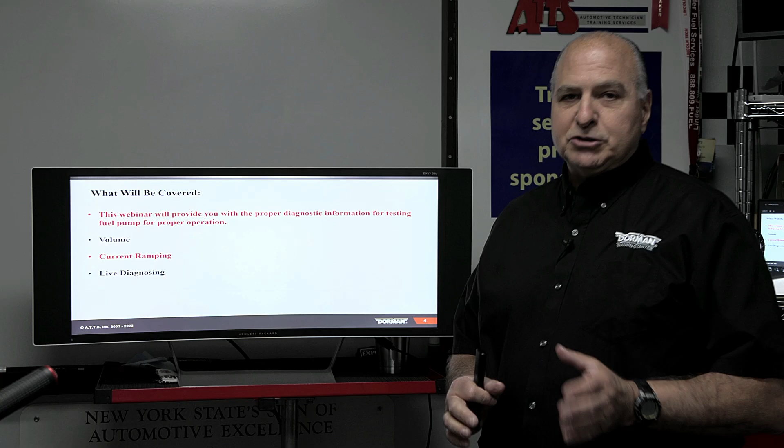So what are we going to do today? Here's what we're going to do. This webinar will provide you with proper diagnostic information for testing fuel pumps for proper operation. We're going to do volume. We're going to do current ramping. We're also going to do pressure. Now, everyone loves the pressure game. How many of you out there actually do volume? Could you type a letter V in there if you do volume so I can kind of see that? Because volume is the key.

You know, like in electricity, voltage is pressure, amperage is flow. Which one does the work? The flow of electrons, right? Amperage. Same thing in fuel. And I'm going to prove that to you. If we could switch to the board.

This is a special fuel pump tester machine. Thank you, good guys out there. And if you don't have one, I'm going to tell you how to get one. So this particular setup right here, I'll just throw it on real quick, but we're going to be using this. So we can see we have pressure, we got volume, and we got current. We're also going to current ramp it on a scope.

So I'm going to show you the first thing that you really want to do when it comes to checking an automotive fuel pump, or for that case, even a diesel primary pump. Remember, never a secondary pump, including GDI, gasoline direct injection. So we'll be using, let me shut that off, because it'll be noisy in the background. We'll be using this special fuel pump testing equipment to prove out amperage, pressure, and volume, okay?

So we're always going to start with the easiest thing first. And by the way, this tester uses lamp oil, so it's not dangerous like gasoline. I will switch out a couple of fuel pumps, and that way we can test it. How many bar commutator do we usually have in an automotive pump? Usually have. Sometimes there's variables. So if you can type a number in there, that'd be great. Can I ask you a couple of questions?

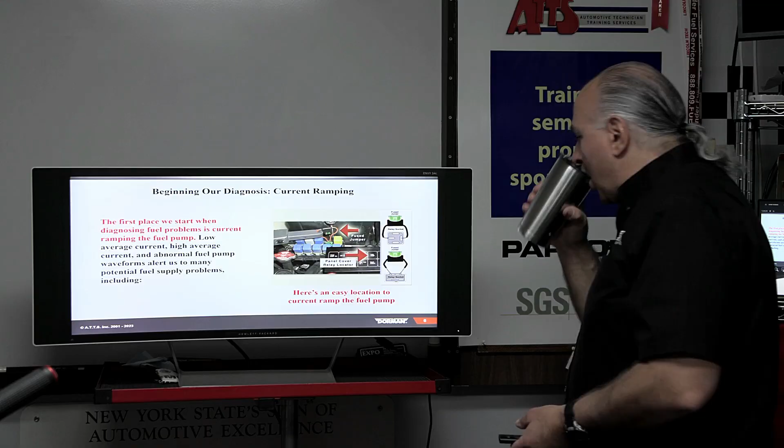What do you think that was?

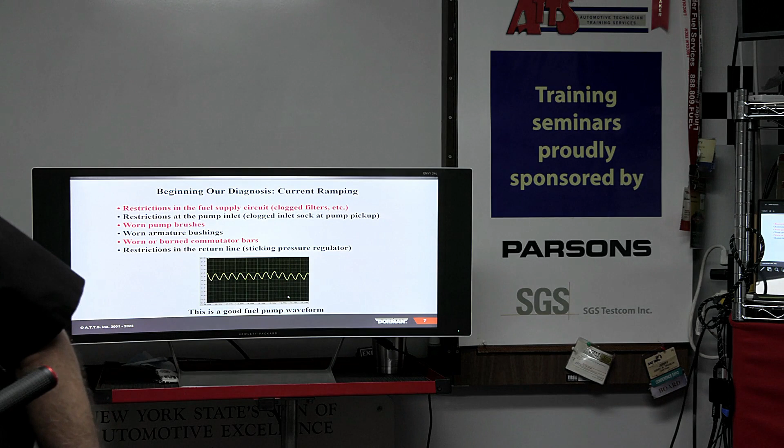And what happens at the end of a pump? What we have in these things, like this pump here, we got bushings in here that go near the end. So let me put this close to me. You got a bushing here, and the nylon bushings heat up, and the nylon bushings tend to melt, and rather than this thing going in a perfect circle, it's going to wobble. It's going to wobble because in here is a magnet. And of course, now we got three-phase fuel pumps, but we're just talking regular fuel pumps in this particular one.

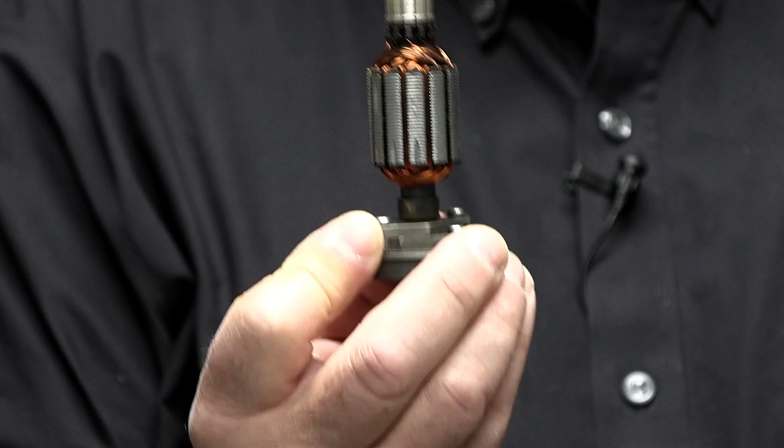This is your armature. The armature here is every one of these things where you see the winding go through. So this one is not an 8-bar or 6-bar. This is a 12-bar pump, okay? 12-bar pump. And usually the German manufacturers do a better job with putting bearings in there. So if you get a Pierburg pump, some of the Bosch pumps, some of the Siemens pumps, those pumps are better, not inexpensive, but most of the other pumps you're working on have a nylon bushing.

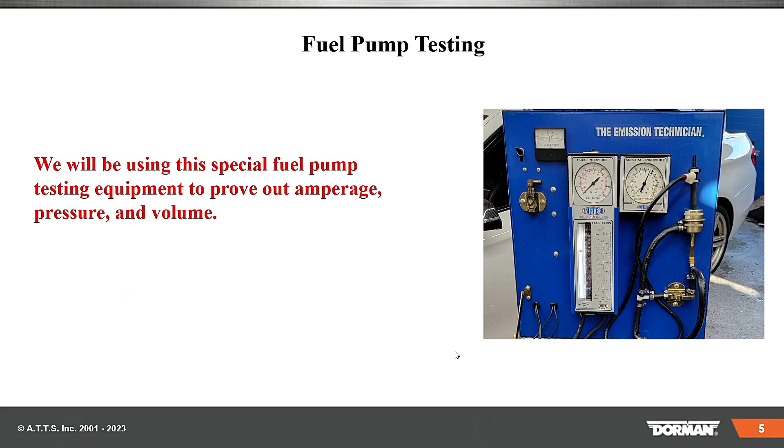Run it low, heat transfers to a nylon type of bushing, what do you think is going to happen? Rather than going perfectly round, you're going to be wobbling once it heats up. Oop, I went backwards. Sorry about that. Worn or burnt commutator bars, that can happen. Restriction in the fuel line, sticking pressure regulator, that would give us higher amperage, correct? So you always want to check what it is. This is a quick, fast check.

9 out of 10 times you could easily connect to one of the wires, positive or negative near the fuel pump, or go to the fuel pump relay like we said. In most cases, not all cases, because I know the real world. Sometimes they tell you number 8 is the fuel pump relay, and you go there, it's not the fuel pump relay. But in our shop, we'll use AllData, ProDemand, Identifix, or Motologic. You could find out where the relay is in case it was marked wrong or not marked at all.

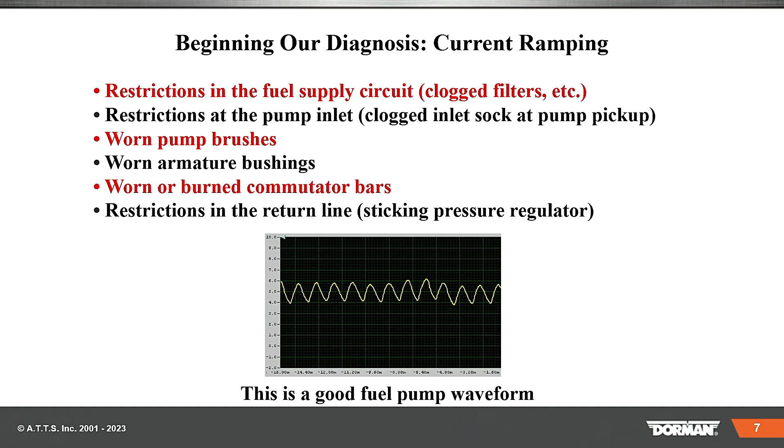Now, for you rocket scientists out there, I put this in here because this is the diddly deal that a lot of you like to know. Right here on slide 7 that this is a pump where we have 100 millivolts per division equaling 1 amp. So your amp clamp would go on 100 millivolts per division. You would then count it from the bottom. If this was our 0, 1, 2, 3, 4, 5, 6, and you go to the top, this would be a 7 amp pump. So we would say this is our 0 because this is most common.

Now this is, again, a non-computerized pump, but you can still do the math if you want. There's 1,000 milliseconds, and our 15-millisecond span, because there's 2 milliseconds per division. You count this across, 2, 4, 6, 8, 10, 12, 14, that'd be 16. So 15 milliseconds divided into 1,000 milliseconds. Why 1,000 milliseconds? 1,000 milliseconds make 1 second. You divide that on your phone, you get 66.66 revolutions per second. Times that by 60 seconds in a minute, that pump is running at about 4,000 RPM,

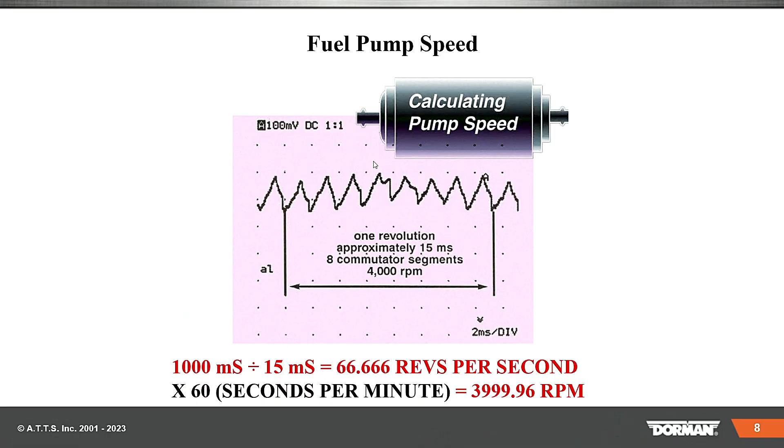Now, when we go on the board, I have a bunch of pumps here, and you're going to see different amperage. You may see one of them with a bad armature in it, but sometimes if they don't do the right amperage, we're using this off roughly a 6 amp setup. So now here, many vehicles use 2-speed fuel pumps. Now, that used to be the case.

Who knows what one of the first, at least on a domestic car, the first variable fuel pump used on a vehicle? If you get that right, I'm going to give you a shirt and a hat. What product? Is it a Ford, in other words? Is it a Toyota? Is it a Jeep? Whatever. What vehicle had the first variable speed fuel pump? And we'll talk about that.

So many of them have that here. The diagram shows a sample of a 2-speed fuel pump right here. So this is something that the Europeans used at one point. In one relay position, the pump receives full voltage and runs at a high speed. So you can be at lower amperage and then go up to higher amperage. So low speed, high speed. Why would they even want to do that? Why would they want to do high speed, low speed?

We're going to show you a bad pump graph. We will do that. I'm looking here as I'm waiting. All right, someone said Corvette. Someone said Chrysler. Okay, so we're looking for the first one, and I'm going to tell you how they did it. Very, very simple. I'll give you another few seconds here because we're on lunch here, so we can't go forever, right? Not a Buick, not a Beamer, not a Chevy, a Ford, a GM, a Chrysler, no. Not a Benz, not a Caddy. Very simple. I bet you've worked on these things and seen it. Nope, not a Tucker.

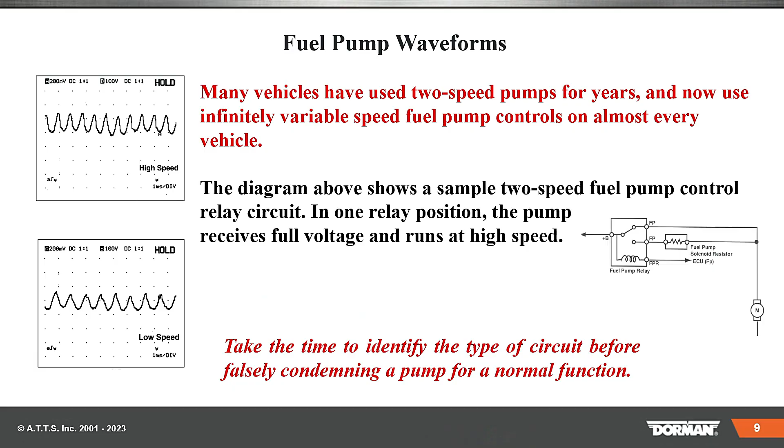Okay. So when you're at idle and the resistor gets hot, because air can cool the resistor, right? The current flow would be low. What would be the fuel volume and pressure coming up? It would be lower. Drive down the road, we get airflow going through it. When we cool the resistor, we get higher current flow. Therefore, that pump would produce more pressure, more volume. Does that make sense? Okay, so that's what we're looking at. Now, here's a bad pump. Let me blow this up.

So this is off my old Fluke 98 from years ago; it doesn't matter what scope you have it on. We're not going to use that today. We're going to be using an E-scope today. But every 100 millivolts equals an amp. If this is ground, 1 amp, 2 amp, 3 amp, 4 amp. It doesn't even make 5 amps. And what do we notice here? We do not have good consistent humps.

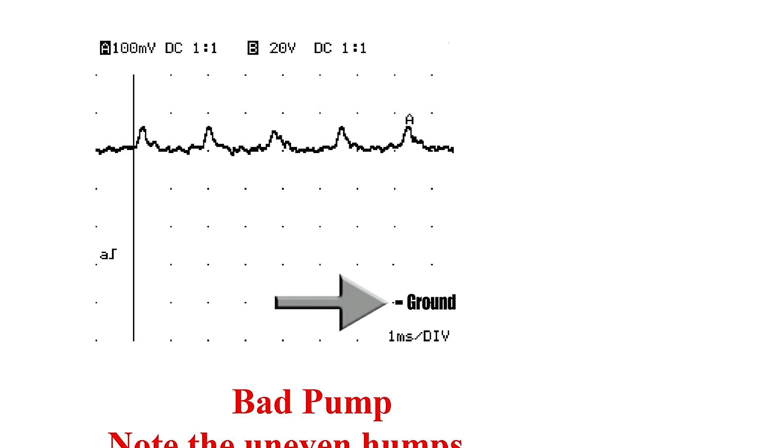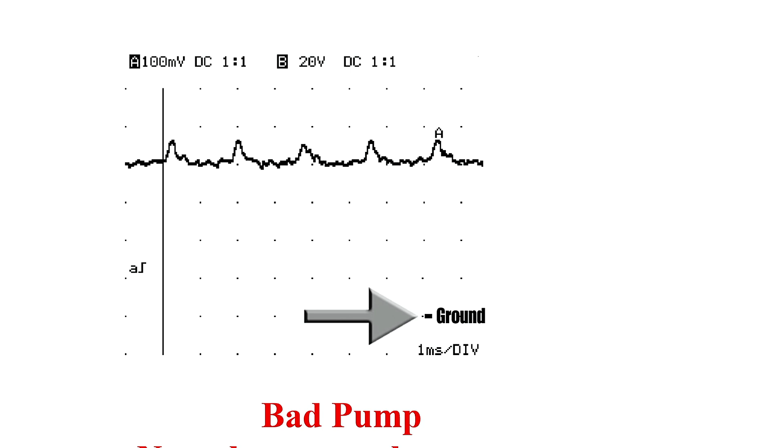Okay? Here we got another one here. Here's a good OE pump. And again, if you go 200, you're at 6 amps. Go by the height. Here, we're at 100 millivolts per division. And if we go here, 1, 2, 3, 4, 5, 6 amps. But it looks totally different, doesn't it?

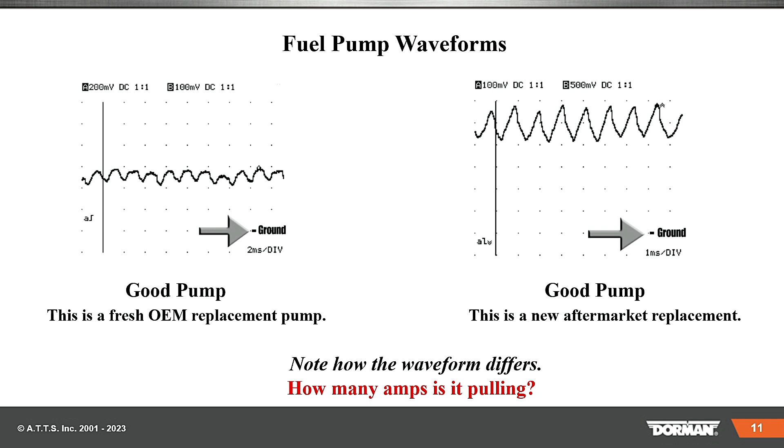These are called pump signatures. Doesn't mean the aftermarket pump is junk or anything, okay? It's just a different signature of the pump is what's going on. That's it, okay? There's no other problem. Remember always to zero an amp clamp near where you're testing. So I'm going to show you that on the board there in a little bit, okay?

Now, let's say someone broke your amp clamp. Like, oh, my guys have done this. Closed the hood on your amp clamp. Now, I have a load of them, but years back when they only had one of them, they closed the hood on it and it was broken, uh-oh, or your battery went dead and you don't have another 9 volt in your shop. Can't do it. Well, you may not be able to actually tell the exact amperage of the pump, but you see this?

I'm on AC voltage. AC voltage right there. Above and below 0. And you see here, this is ground. You see how we're going up and down? Does it look like it mimics the waveform above? Take a good look at that. I want to blow that up. Take a real good look at that. Come on, fingers.

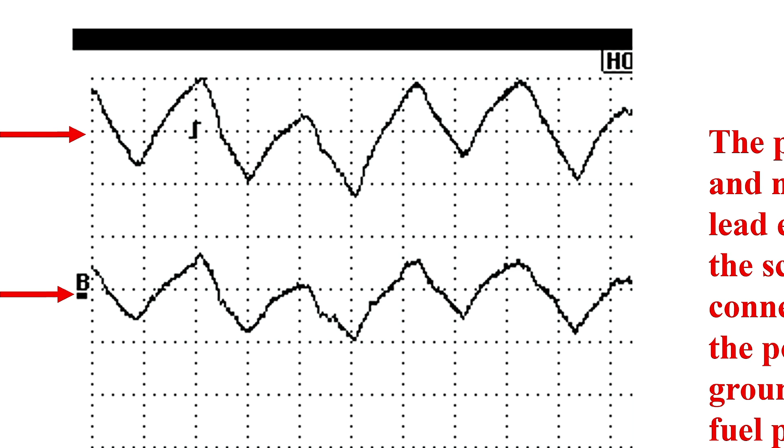How are you going to do that? How would I do that? Well, I'm going to tell you how we would do that. And I'm going to show you, because we're going to actually do that on the test board. The positive and negative lead ends of the scope are connected to the power and ground of the fuel pump. So if you don't have an amp clamp, you can still capture a waveform. Does that make sense to everyone? Okay. If that makes sense to you, I'm going to show you, again, seeing's always believing, right? That is an important thing.

Now, this is a great chart, especially for you guys that current ramp. So if current is low, pressure is low, volume is low, low fuel pump circuit voltage. So what's that mean? You have VD, not you personally. The fuel system, the connection, voltage drop is what we're talking about here. You have corrosion. And this time of year, today I think we'll get maybe our first snow, a couple of inches or whatever. But in most places, in the real world, you've been getting some snow, right? And they use salt and all that.

How many of you have unplugged the fuel pump and you see behind the rubber boot, in the wire connection, everything's corroded? What you need to do before replacing that pump, whether it failed for amperage or current ramping test, you need to clean that all up, okay? You use that DeoxIT spray cleaner. I forgot the exact name of it, red and black can. That's a very good cleaner. After you're done cleaning it, you put Stabilant 22A only on the male pins. Stabilant 22A is a contact enhancer. That way, if you see the pump gets back to normal life, all you had was a voltage drop. You did not have a bad pump. No need to change it.

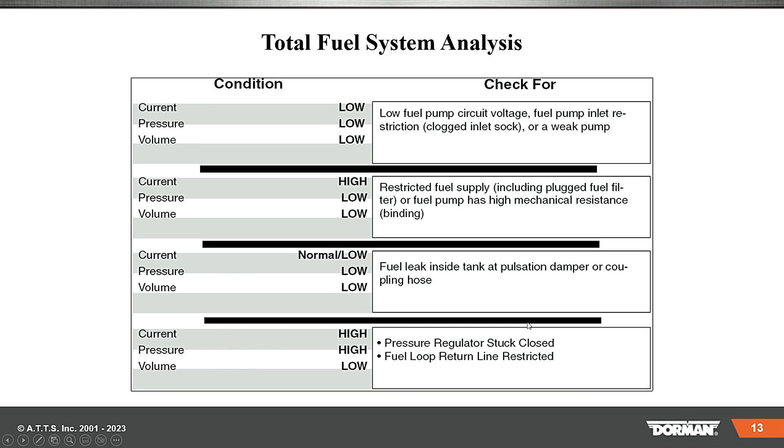Now, the last one, current high, pressure high, volume low: pressure regulator stuck closed, fuel loop, return line restricted. Write that down here. Here's where you may be lucky and get yourself a new pair of vice grips, which you should never crimp a hose with. Even if it looks rubber, it may have nylon inside that rubber. Always make sure what you're using. We're going to show you this particular tester here, but what we use in our shop now, even though I have a few of these, is the one from Mityvac.

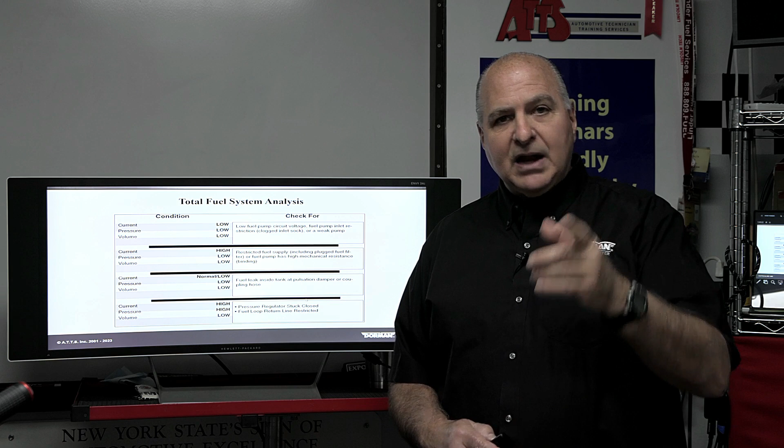And if you ever look at my videos when we're in the shop, in the back right of the corner, well, if I'm looking at it, it would be to my left in the corner, you'll see a Mac Tools one. That's Mityvac. I had done something for Mac Tools and they had an insert that I put in and I never took it out. That is a good tester. You can get that through O'Reilly's, Napa, CarQuest, Advance. They sell them all over, about $600 or so. Great thing to have, because that's what really counts.

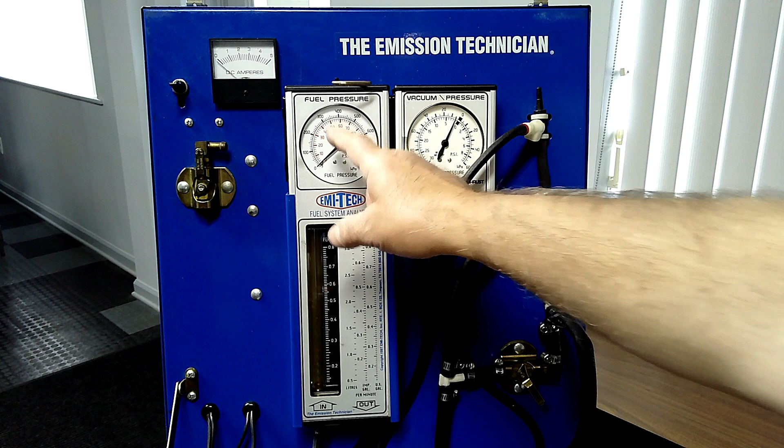Okay, so now let's do it live, right? So now, doing it live, this would be like just in your shop. So we're going to switch over to this camera. We're going to look at pressures here. Don't worry about the vacuum gauge, we're not going there. We're going to look at volume here, and we're going to look at current here first before we go on a lab scope. So let's put this on. What do you think about this reading? Can you all see it real good?

Okay, so Ed Smith: current low, could be a bad fuel pump ground. Yep, very good, Ed. That's a good possibility. Anything else? We got about, I think it says about 4.5 amps there. So if you see something else, let me know what that something else is. You're right, typing it in there, Peter and Tom and John. That's all correct. But first of all, what do we know about our fuel pump pressure? Is the pressure good? So let me blow this up a little bit here.

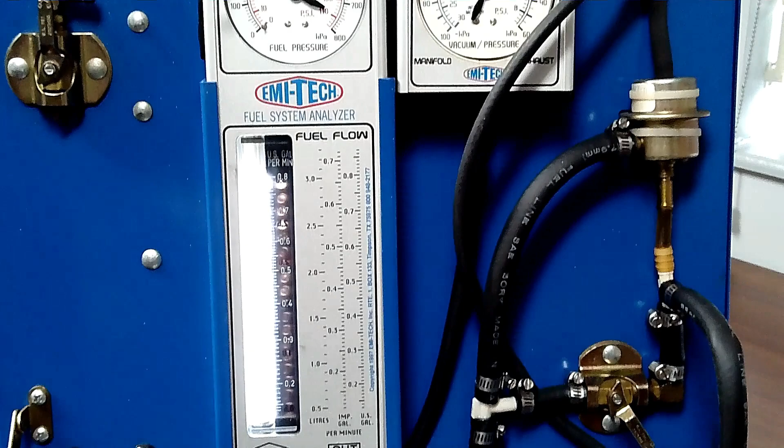So look at that pressure. We're only at 30 psi. Then I want you to look down here, and let me move that down a little bit. A little hard to see that ball, huh? Can't really see it. I've seen it before. So that ball is right here. And if we cross that over, we're roughly about 4/10 of a gallon, which is, let me see if I can kind of block out.

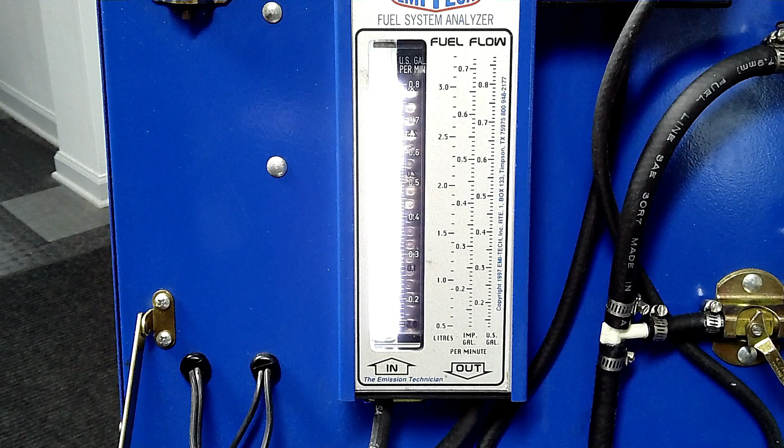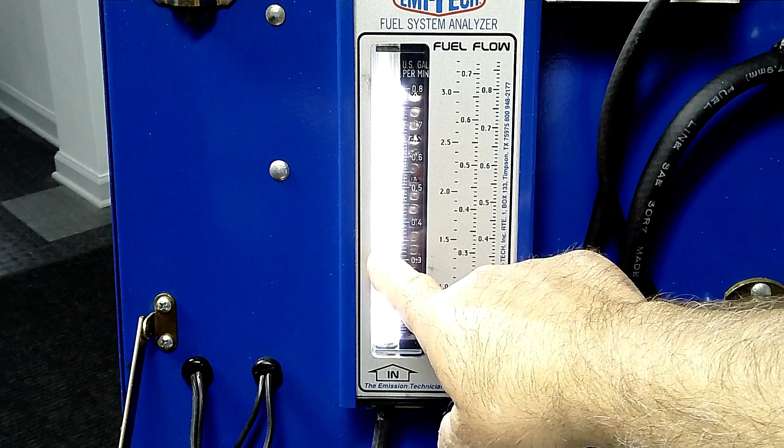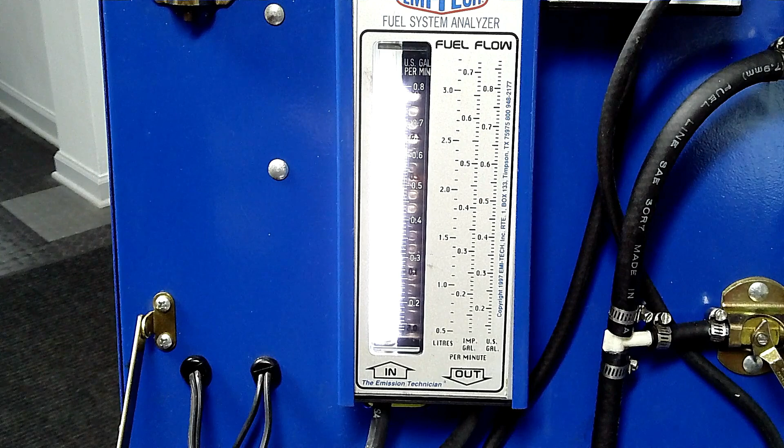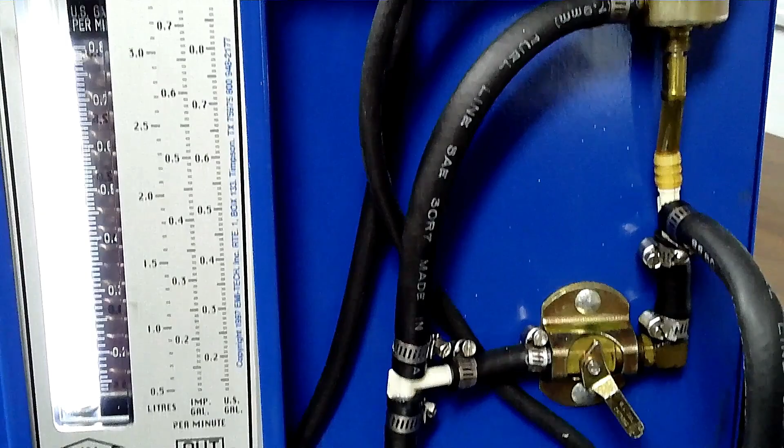It's the light on the machine, Jay. Oh, it's a light on the machine. Beautiful. Usually that's supposed to help you see it. Well, not in this case. How about that? Is that a little better? They can't see the ball? Ball's right here. Cannot see it at all. Let me try something like that. Can they see it now? No, it's the light on the machine. They have the light on the machine so you can see it, but you can't see it. Can you take it off? I don't know if I have that much hose. You take it off, you can see it. Yeah, but I can't. I got too many hoses. Let me see if I can go in a little more. It looked good before, but I think the light from above is giving us a problem too. Shut the light off for a second. No, worse. How about a different angle? We can't spend a gazillion hours on that. I guess the LED light behind it is bad for this camera. Sorry about that. You'll have to believe me. Just point, and they'll know.

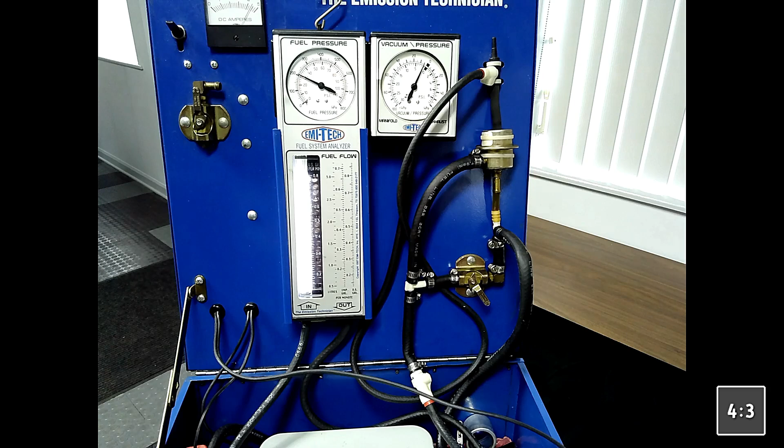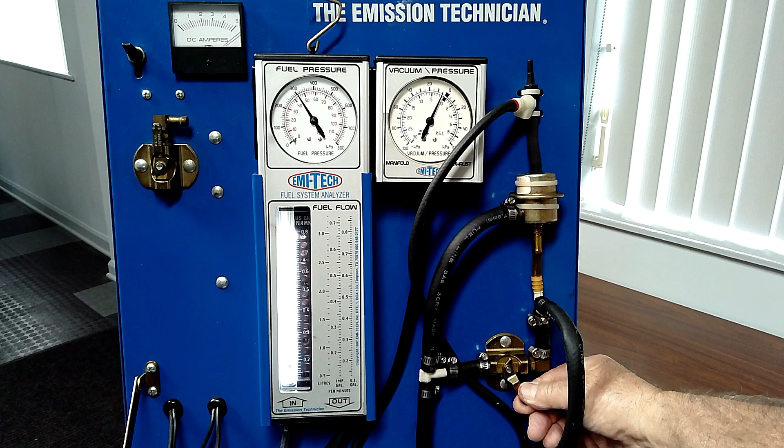Yeah. So the ball is basically right here. So now I'm going to raise the pressure because let's say our spec is 40 pounds, right? So 40 pounds, let's take a look. Right there, 40 pounds. The amperage is 6 amps. Let's look up there. Okay. Somebody said adjust the white balance on the camera. You can't do that on this camera. Just point. Okay. Now our current is all the way down here. You can't even see the numbers on this.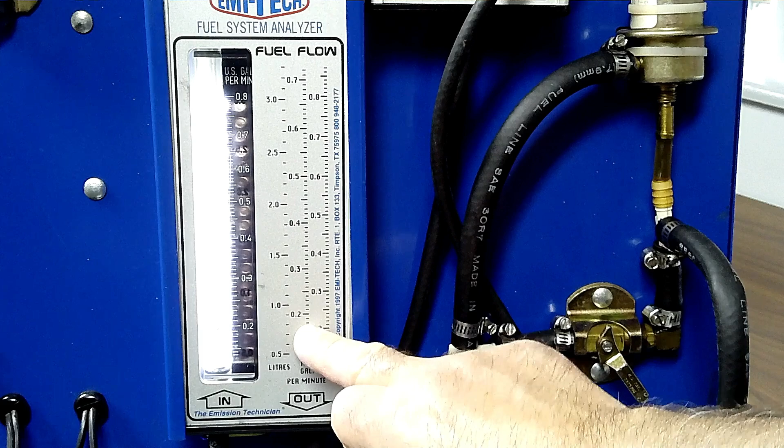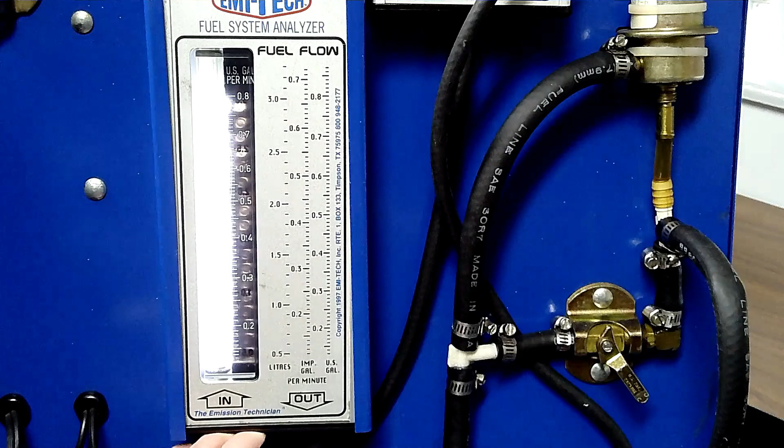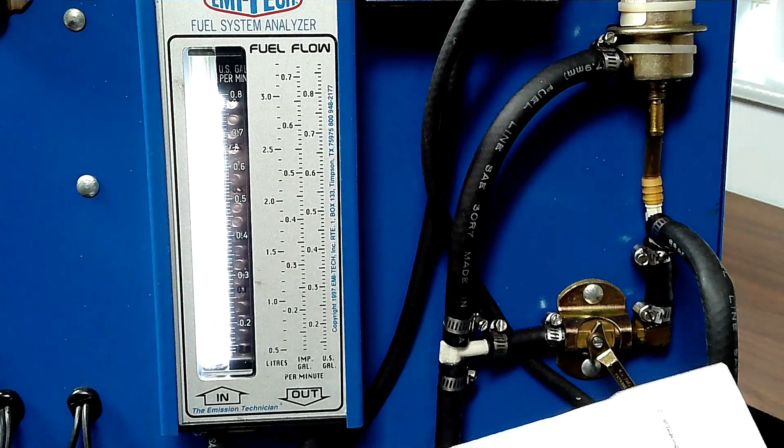Okay. Someone says put a piece of paper behind it, but that would take up the whole friggin' time. Well, I'll try real quick. We'll try to throw a piece of paper behind it. Hang on. That's a good idea. Can you drop it down? You need a thin piece of paper. I don't know what this is, but it's going to become a thin piece of paper now. Hopefully it's nothing important. Got it.

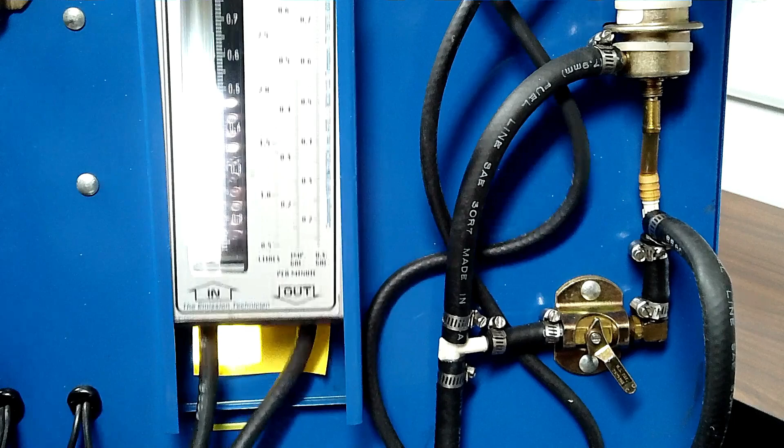How's that? No, I still can't see it. Pull it up for a minute. Take that out. I think you can see a yellow paper. I don't think you can see it any better. Oh yeah, you can. Very good. Now how's that? Can you guys see that? We have to put paper behind it.

All right, go ahead. Okay, so now we got amperage over 6. We got 40 pounds. Is this good enough? Now, let's say the spec on a car was 40 PSI, okay? If it's 40 PSI, is that pump good? That's my question. Is that pump good? And thank you to Doreen for coming up with a little piece of good paper, unlike my junky paper, I guess. So what do you guys think? Is that good?

One guy says, you better give the guy a t-shirt.

Okay, it's no good. And here's the reason why it's no good. We have poor volume. So volume could be a huge problem, right? Now, let's current ramp this pump. I'll take some of the pressure off it. And we're going to switch over to our E-scope. We're going to take our amp clamp and we're going to go to the first click, 1 mV.

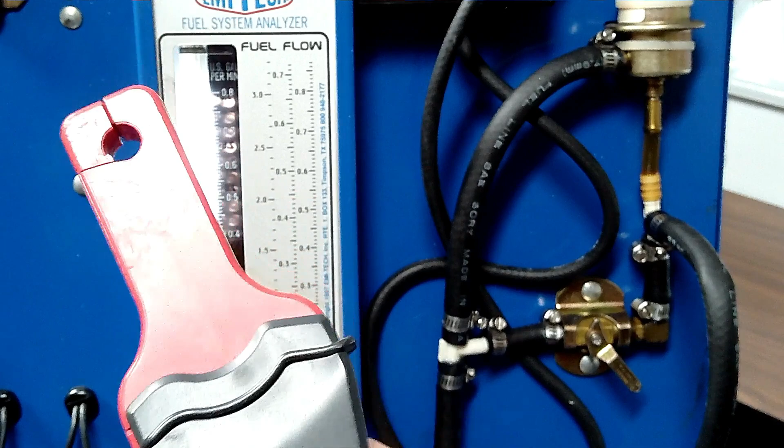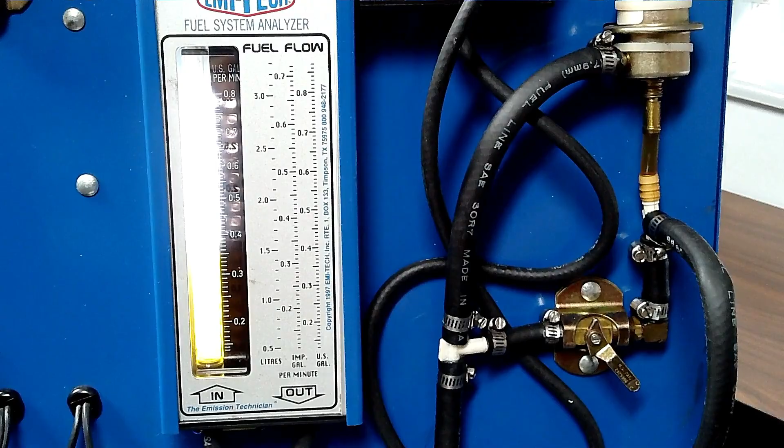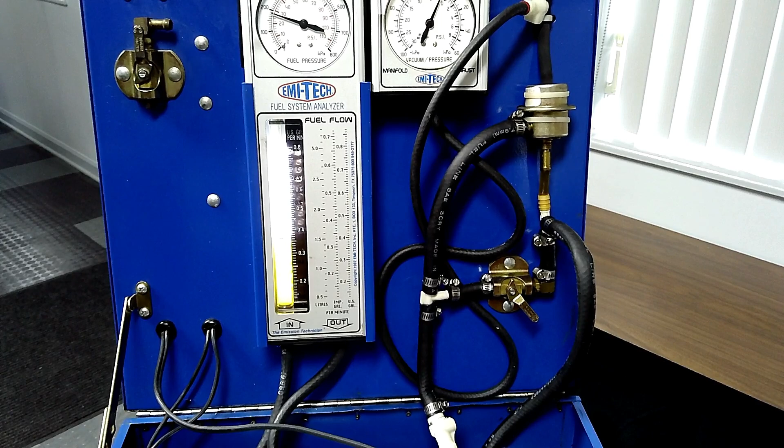1 mV equals 10 mA, or the newer ones all say 100 millivolts equals 1 amp. And that's what this is going to be. We're going to zero it near the wire, okay? Our wire right here. Okay, I got to zoom out. One more zoom in. So I'm going to zero it near the wire, put the pump running, and put my amp clamp on, making sure the jaws are closed. I am now going to go to the scope, and my scope I have on every 100 millivolts equals 1 amp, or you can go by the rating on the particular scope, and in this case it's the 20 amp rating.

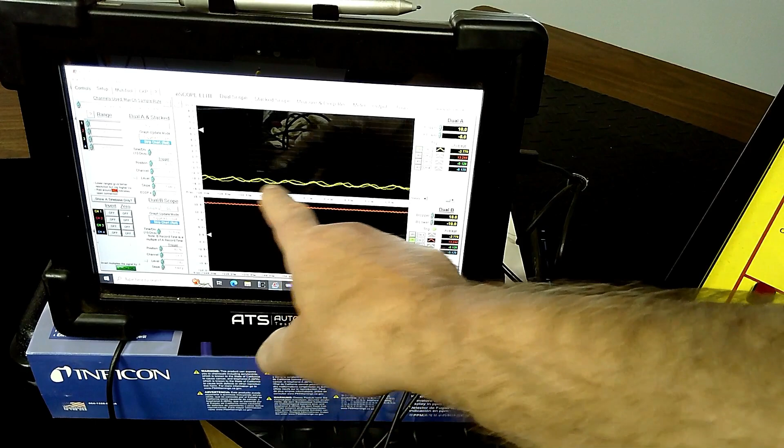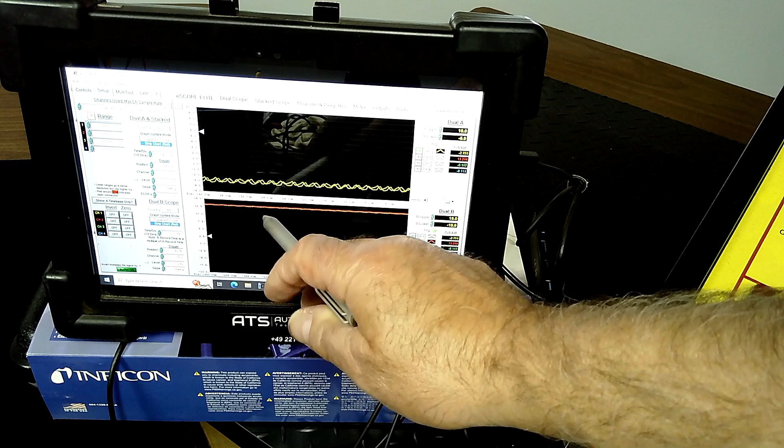So here's our current down here. We could change that if you want to see more ramping by changing the time. And now you can see the humps. What I have on the bottom here, which is very, very small, is the voltage of that pump. Okay? Now, everyone see the yellow? You can't buy this fuel training aid. It was made for me by Larry Gouge, the inventor of the smoke machine. So now, everyone see where the pressure is? The ball's down here, right?

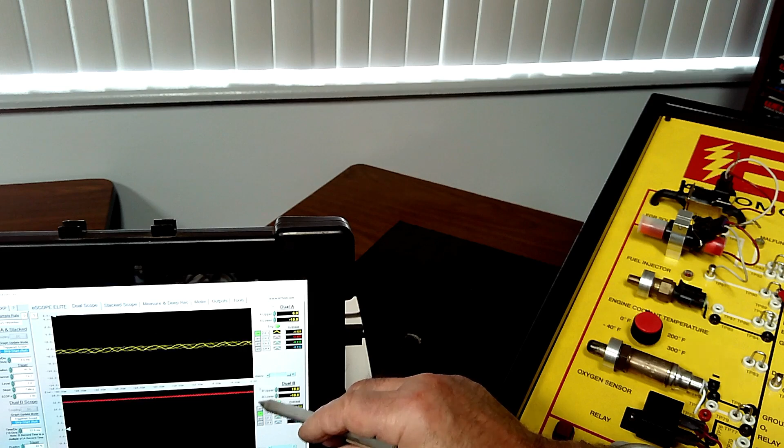Watch this. I'm going to put more pressure. Look at our current ramping. You see what that is? I'm going to have to go up a box. And you notice it's still pretty far down there, right? Oop, got to go the other way. Go down a little more. And let's bring the bottom up. So you can see the pump is going at a higher speed. You see how it's going across real quick? I will change that pressure. You see how that went up? You hear the noise? Now I'm going to drop it. And you see how it's slower going across the screen?

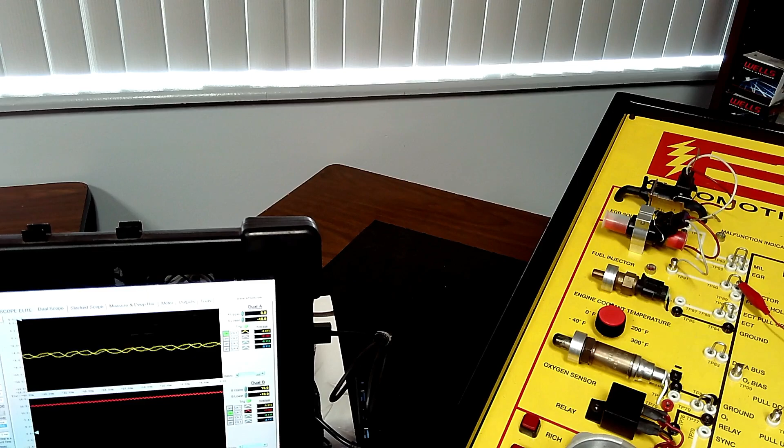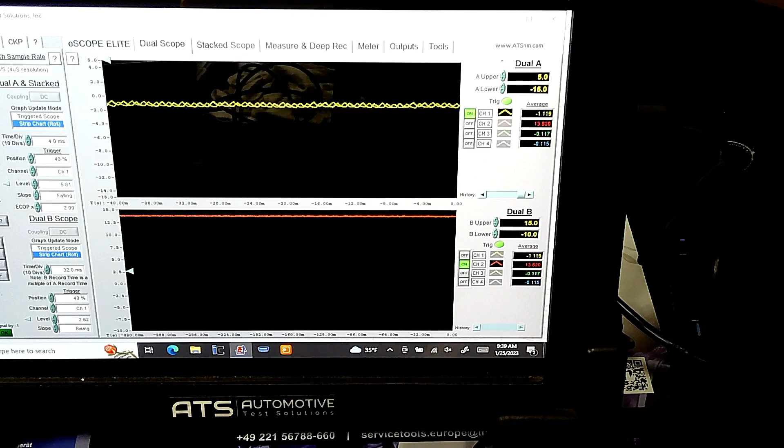They want you to zoom into the scope. Zoom into the scope? Yep. Okay, so this is at a slower speed. And I think you could hear the hum in the background of the fuel pump, right? Now I'm going to change the current. See the speed and how the amperage changed? And you hear that thing pumping out? So we're going to leave it right about at this speed. And you really don't see the voltage. I'm on power and ground here.

So I'm going to go into deep record where you don't need to set anything up on this particular scope. I'm going to put my 2 channels on. You see the greens here? These are my channels. I'm going to hit start deep record. I'm going to stop this. I'm going to shut off the noisemaker in a second, just so it's easier to hear me. Okay. So now I want you to look at the scope. Red is the voltage.

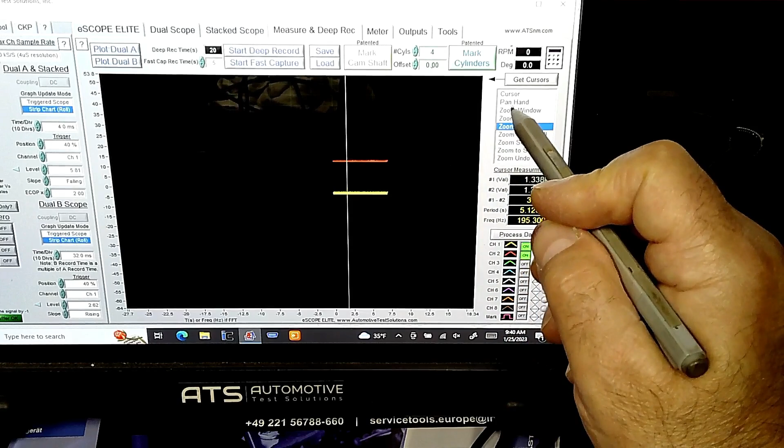I am going to zoom out. I'm going to use the zoom window. I'm going to zoom out again. Use the zoom window. Now, can you see the amperage? This is the voltage. Now, of course, I can still zoom again to show you the pump, right? And I can use the pan hand and then zoom out so we can get the yellow in the screen. Oop. Sorry about that.

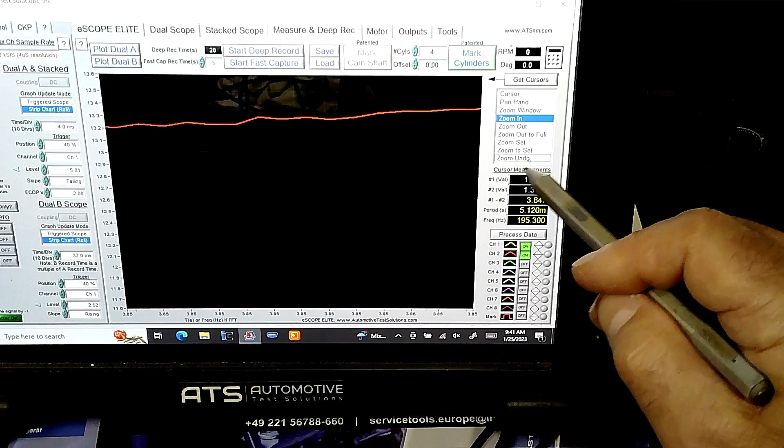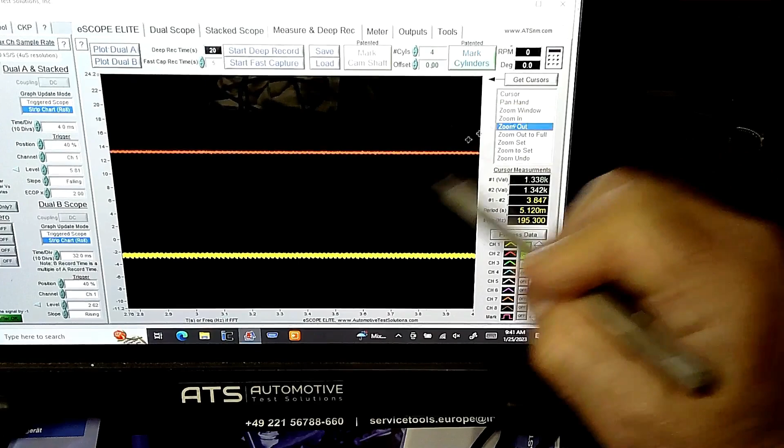One good thing is when you mess up, it's real nice that you can just zoom out. Then we'll use the zoom window. We'll zoom out again. And you can see how the amperage and the voltage are starting to look like each other. So just like I showed you on that other scope, this is more flat right here, but I think you can get the idea of how you can put them together and see if you got a bad pump.

Any questions on that? Now we're going to look at a couple more things here on the pump, get away from the scope stuff. If you have any questions, please let me know. But we still have time left, which is great. Let me adjust this thing here and zoom out a bit. And one zoom in. All right, move this, straighten this all out.

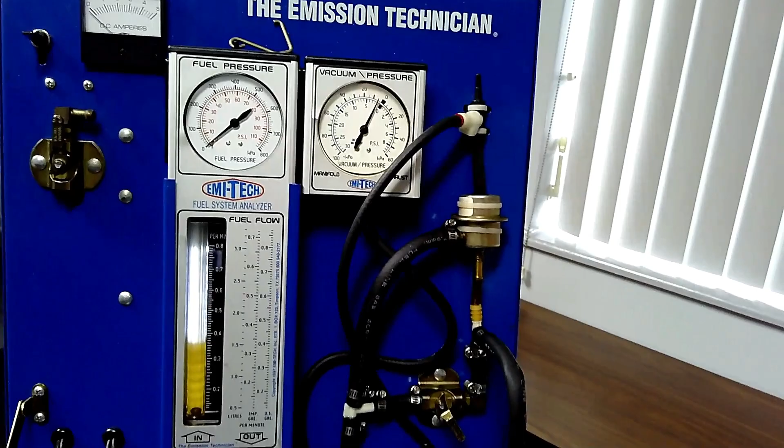And I hate looking backwards. Boy, it's tough. Drives you nutty when you're looking backwards.

All right, so now I'll just move this back a little bit, give us a little more room here. And I'm going to show you where the tank is on this thing. So I'm going to take my amp clamp out of here so I don't get any lamp oil on it. I'm going to move that to the side. And by the way, here's where the voltage reading was from, power and ground. That's how I was getting a current reading, or a signature reading, I should say.

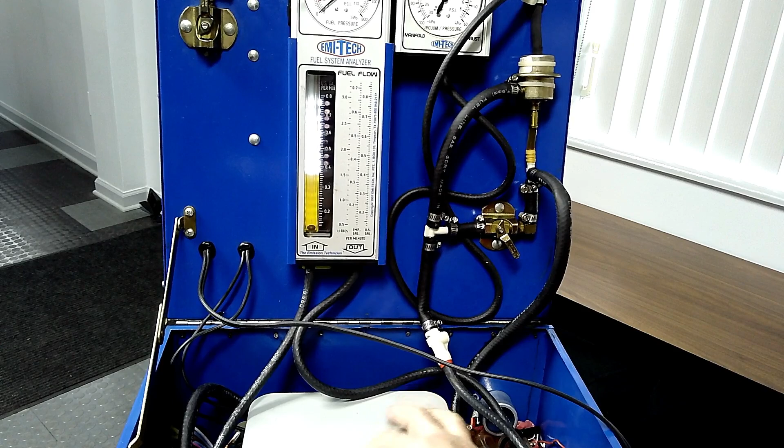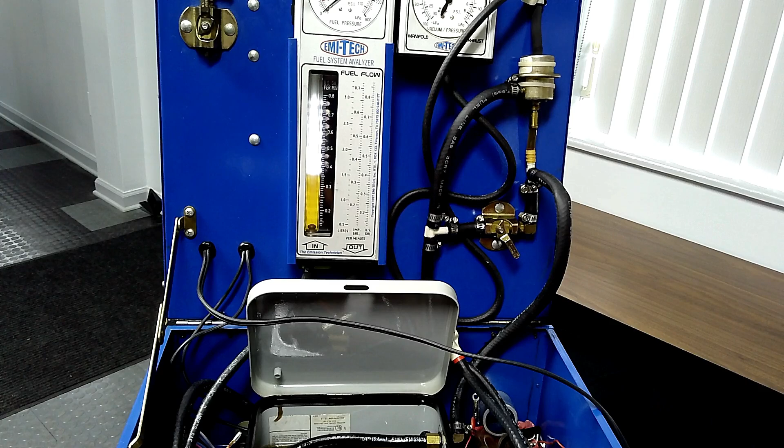And what we're going to do here is go into this box. Just get myself a couple of rags, and we're going to change a pump out. We can change a few pumps out so you can see what different pumps would look like at the same type of current flow through it. You can't see the pump yet, okay? There you go. There's the pumpies. All right, so I got to take a dive in there. It's time to go swimming.

So let me unplug this thing. And here's the screw clamp that I was speaking about. These screw clamps you got to be very careful with. If you over tighten them and rubber starts coming through, then you're going to have an issue. Okay, so let me take this out.

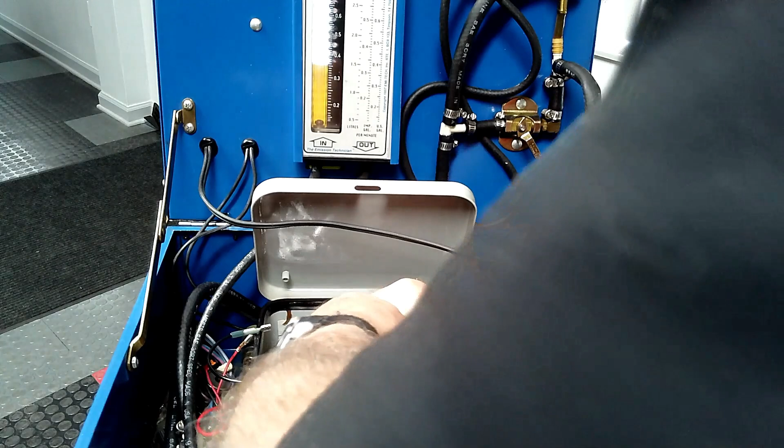I had a question while you're doing it. Yes. Would you be able to see a fuel volume issue by measuring pressure under load, i.e. power braking? No, pressure is pressure, volume is volume. So you're really not going to see a lot. And by the way, here's what your screen looks like. It should go on the end of the pump. This is your sock. A very small amount of dirt can't get through there, but fine silt can get through there.

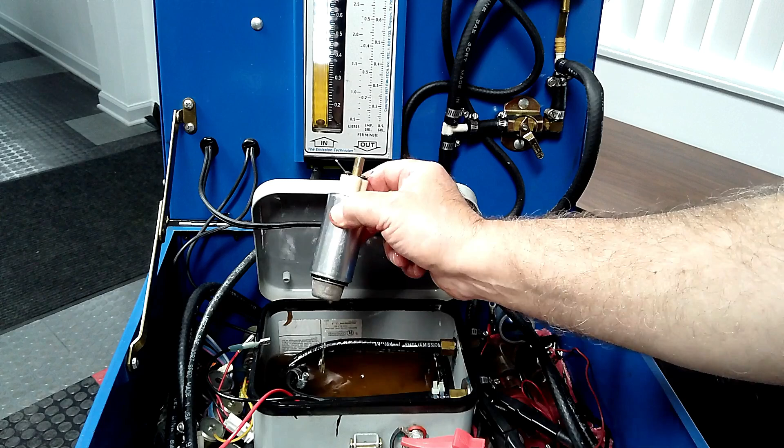Here's our other pump. So we're going to try this pump here. There's a positive and a negative. So we're going to plug the negative lead in first. We're going to do the positive lead here. And by the way, there's also a lesson like in electricity with pressure and volume, right? I'm going to put the hose on. I'm going to lock this clamp up real quick.

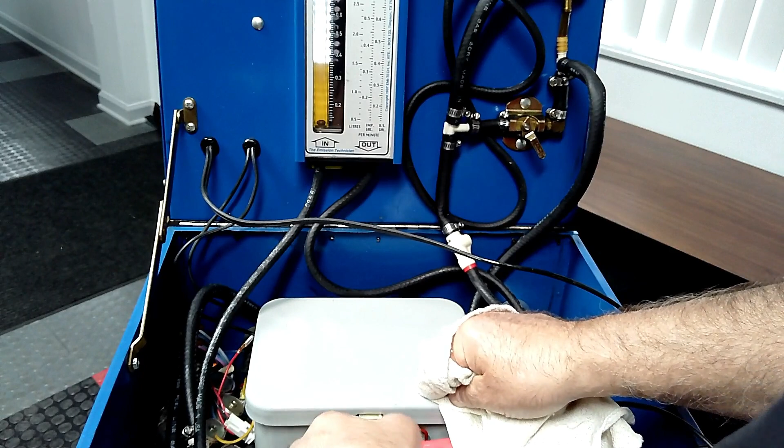We'll submerge that baby. Stick that down so in case it pops off, it doesn't get me all wet. Should lock the top for safety reasons. And let's run this baby. So I'm going to move this up because you don't need to see that anymore. Let's run this pump.

First of all, the ball is up here now. You can't see it. Do we have another yellow piece of paper we can throw in there real quick? Okay, Doreen's to the rescue. Beautiful. Now you can see it, right? Yep, you can see that ball right there.

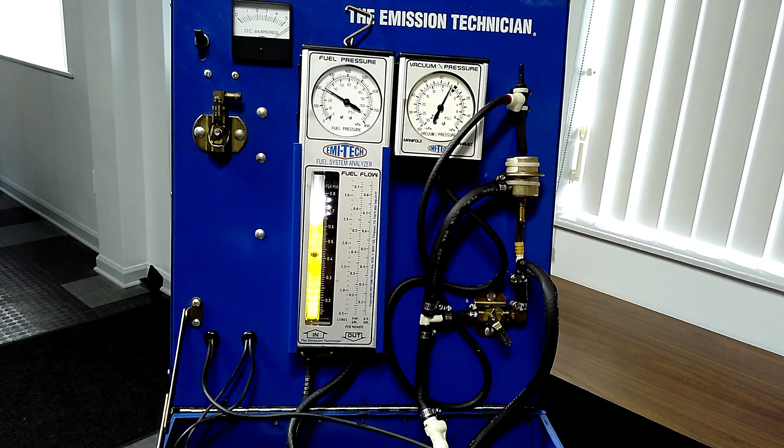Now at a half a gallon a minute, I want you to write this down. A 4-cylinder, non-supercharged, non-turbocharged vehicle should have a minimum of 0.4 of a gallon. A 4-cylinder turbocharged or supercharged, 6-cylinder, and 8-cylinder should have a minimum of 0.5 of a gallon, half a gallon a minute. If you don't have that, you got a problem.

Now here's the other thing with pressure. You all looking at pressure? We're going to do cavitation. Cavitation of the pump, and this is going to be severe cavitation, but you may still get pressure with cavitation. What you're not going to get, now look at the glass.

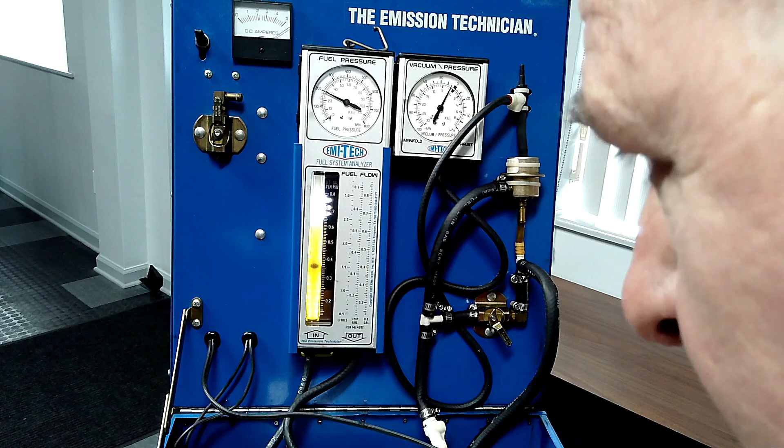You see those bubbles? Everyone see those? Now these are severe bubbles. Can everyone see those bubbles? No. All right, so I got to zoom in. Watch the glass. Here we go.

Okay, we see something. Watch the bubbles. Yep. That's called cavitation. Your pressure would really not show you much there. Now we'll take a quick look on the scope here of, go ahead.

What voltage? Question mark. What voltage? What do you mean by what voltage? If you have low voltage, your pump would have an issue, right? So right now we're going to take this pump, we're going to look at this pump, or maybe just go back here and make life easy for them.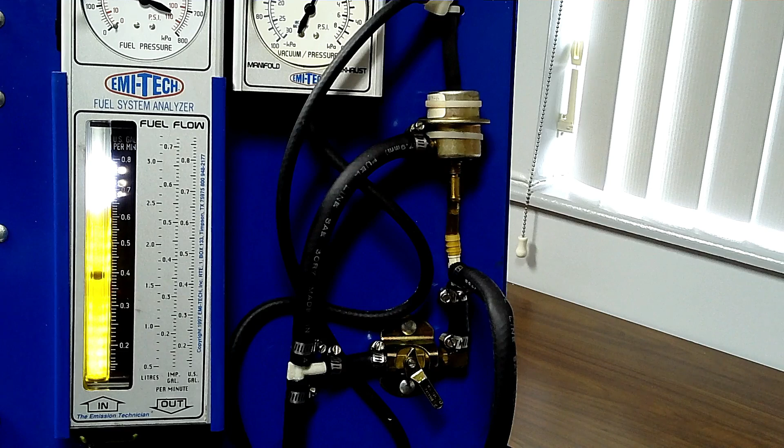Okay, so now I got to get this thing up here more. So here's the pump. Let me change the time. We don't see that. Well, so here's this pump. Looks very similar, but what's the amount of amperage compared to the other pump? We're at 40 pounds. And remember, we had the other one at 40 pounds? Look at the 40 pounds, right? Look at our current up here. We're 6 amps. And look at the volume.

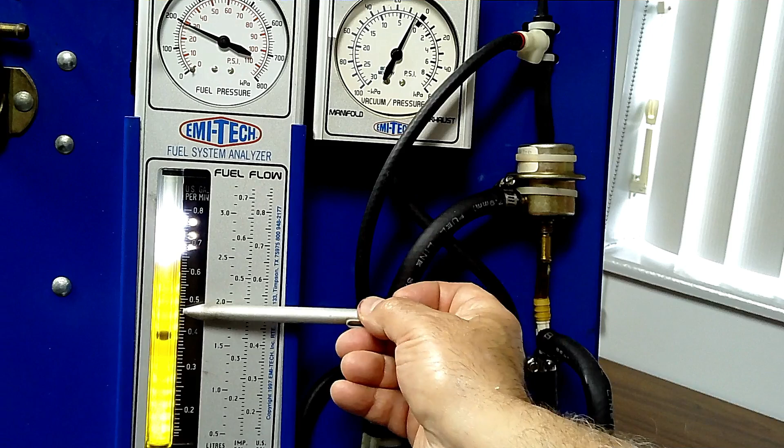So here you would have a pump that's pretty damn good. Why? Because we're hitting, oh, we went down actually. We're hitting a half a gallon a minute. This is flow in gallons per minute. So we're a little lower there, okay? But if we had a half a gallon a minute, then basically we would have a good pump and the amperage would be different. Does that make sense to everyone?

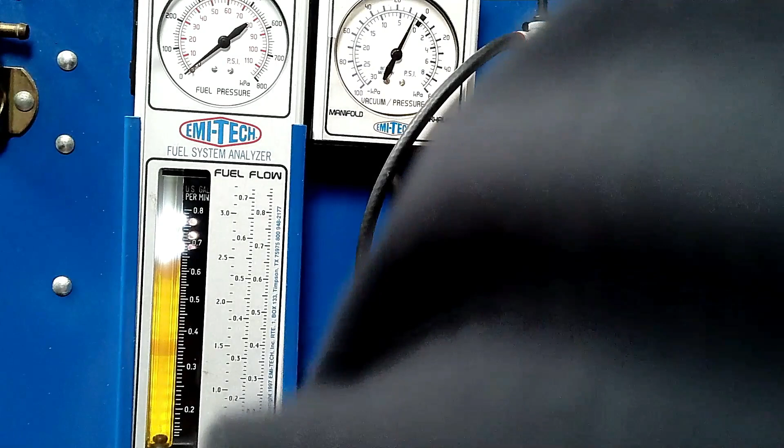Let me switch to another pump and I'll just shut this for a second. Type your questions in there, Dorian, let me know what their questions are as I'm unscrewing this pump and unplugging it. Well, the person that said what voltage are you running a volume test at? Oh, I'm running the volume test at system voltage, which would be 12 to 14 volts. Okay. Thank you for that question.

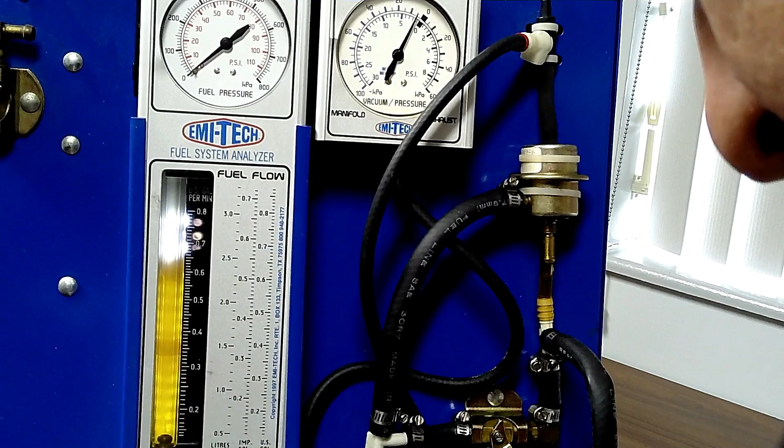Let's see. We'll try a different pump. This one looks good as any other. So there's another pump. Oh, this backward stuff can drive you crazy. Another pump I'm throwing in. These are all different pumps that I keep around that have failed in a car. And what type of problems would you have? What code would be the most common if you had a pump that wasn't delivering enough fuel?

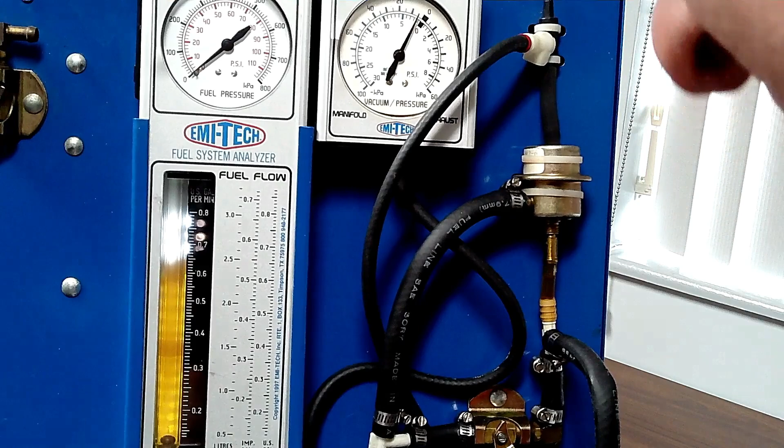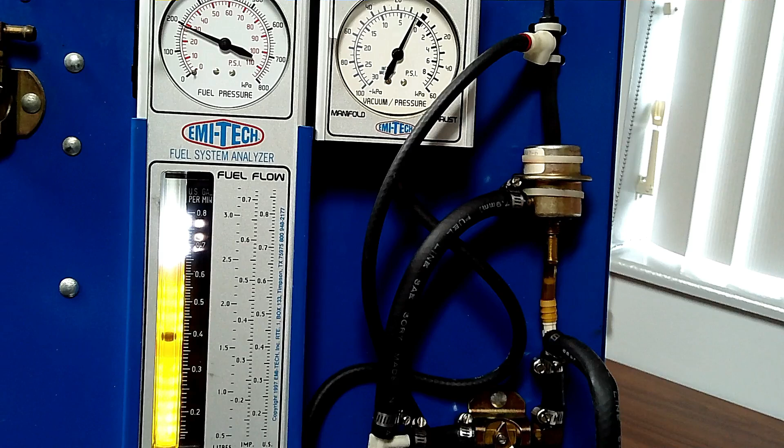So I'm connecting this up. Okay, I'm connected in, put it down, lock her up. Let's see what happens. Hit the switch. You see that aeration that just happened? Okay, so you got a lot of cavitation there. You're at 30 PSI. Our current ramping on the scope, the waveform looks pretty damn good, but the amperage is low. This pump is only at 4 amps, okay?

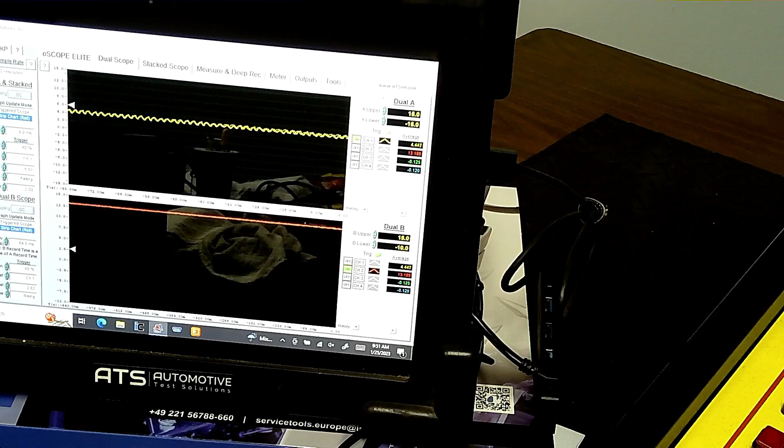Only at 4 amps. So when you go to diagnose a fuel pump, and we'll check one more out before we hit the slides back. Let's look here. That volume. And is our volume good? No. A lot of these pumps that I have here all fail for some reason, but most of them fail for volume, not for pressure. And that's usually what messes people up. They think, I have 50 or 60 pounds of pressure that the manufacturer is asking for. How could it be bad? Because you need volume. And anyone put the answer in for what code will we have?

Yeah, P0171. Very good.

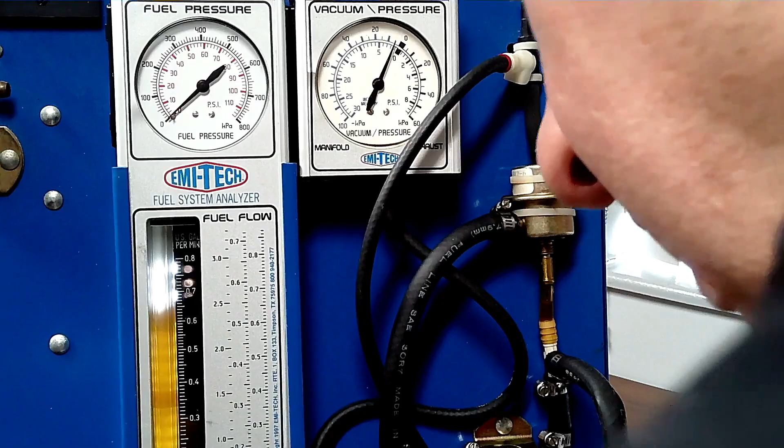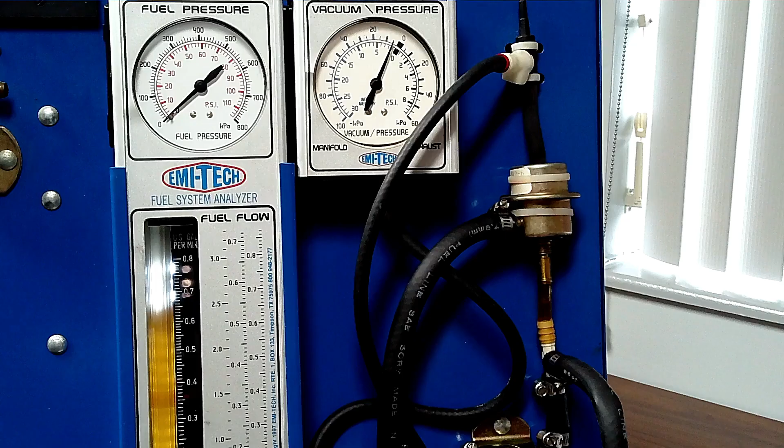So, okay, I'm putting this other pump in. I'll show you what it looks like in a second because you can't see. Go back to this camera. So now we got a fancy blue pump, okay? I'm going to stick this in here. Don't even know if this one works, but we'll find out in a second. Let me lock this doohickey up.

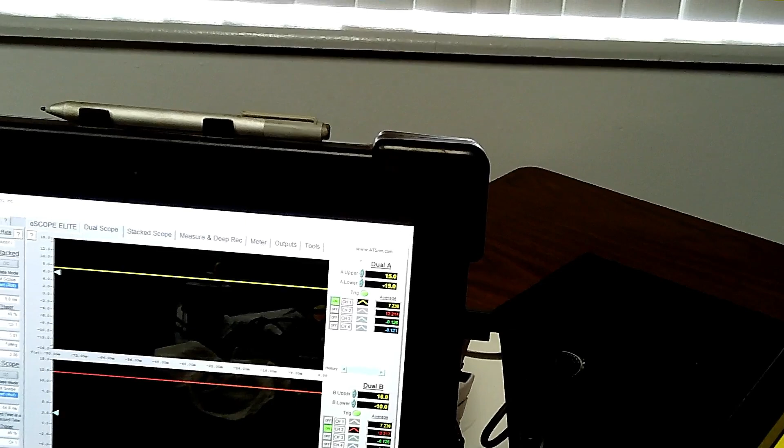I'm going to flip that switch. I'm going to attempt to flip the switch. Let me get on the other side of this. It's like playing musical chairs here. So I'm trying to do multiple things. Switch off. Amperage went down. Well, we can't see. Amperage went down.

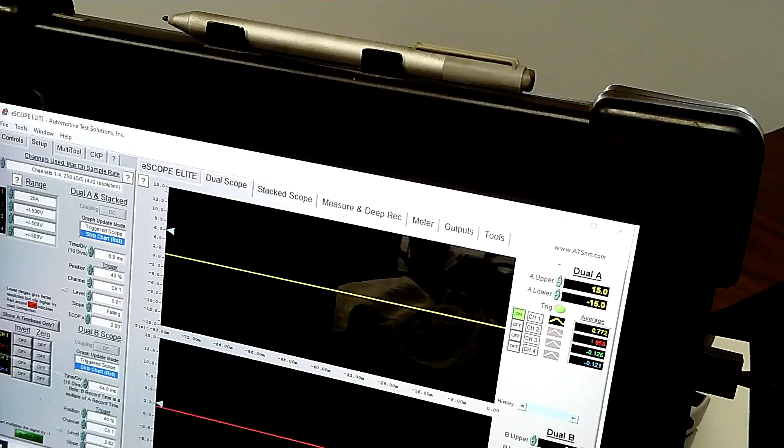Come on. Stop fighting me. Here we go. You see how that amperage went up right away? Yeah. Look at that line. Off, on. So right there, you could see when you could test the pump, you could actually see what's going on.

Let's see if you have any questions. So P71: Is there a generic comparison chart around for specs? Okay. The generic specs, if you're talking about amperage, most pumps are going to pull roughly 6 amps, as we said in the beginning. A computerized control pump is roughly going to pull 2 amps to start with, and then as you were driving down the road, there'd be more.

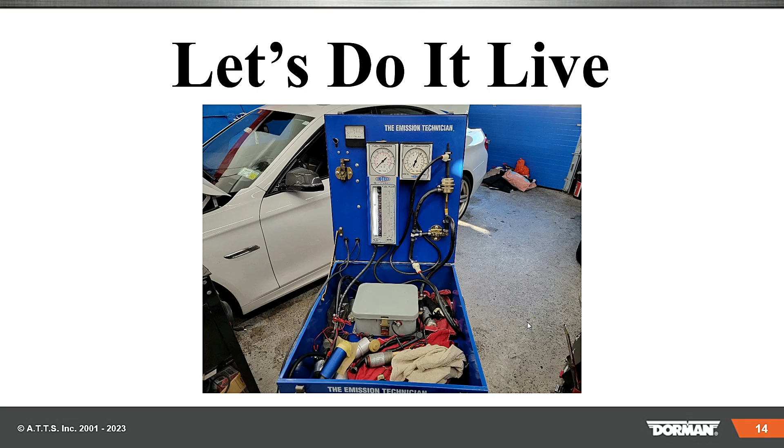Vortec, because they had pushed 60 PSI out to start the engine up, was always a 9 to 11. Some of the Ford pickups that needed high fuel volume, it's going to be up there about 11 to 13 amps. So a chart that's out there, no one really makes it. You got to test it, is what we did years back.

And someone like Tom Petty down there in New Jersey helped. Jim Linder, you may have heard of Jim Linder, the injector guru guy. So a lot of us had the same scope at the time, the LS2000. It's always important to make sure you get the same signature from the same scope. And any other questions you got there?

Let's see. What about brushless fuel pump motors? Well, we're not speaking about that in this particular episode because there's not enough time, but yes, brushless is going to be the way to go. 3-phase, just like everything else, including EPS. We'll visit that at some time in the future.